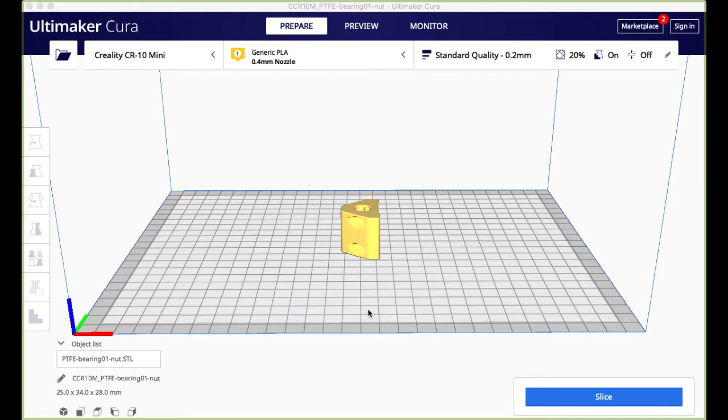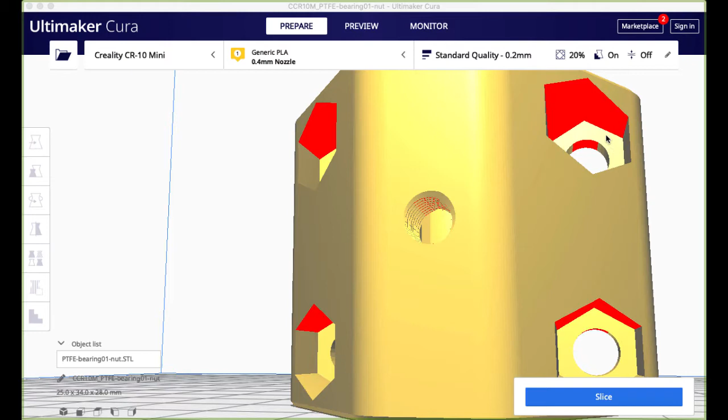So it's a bearing. We have a hole right through the center for the linear bearing to be put through. There's a nut and screw hole here that's actually threaded, you see the threads there to hold the bearing in place. And then we also have these hex nut holes to allow holding the nut in place and the screw to mount the bearing on the other side. I just got this off Thingiverse to use as an example.

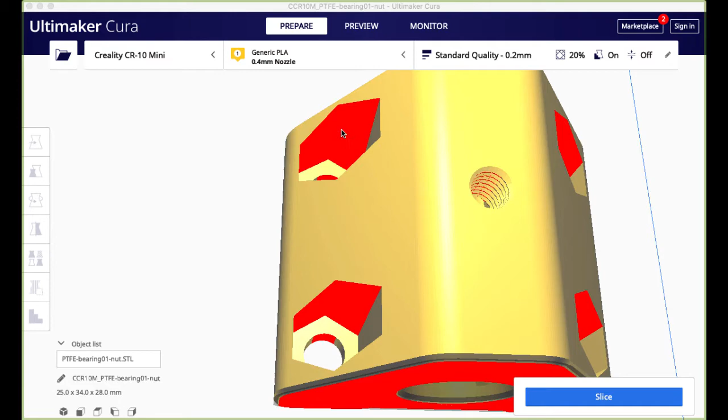Now there's a few things we can do here. Everywhere that you see red requires support, so these require support, all of this is support, and the threaded area requires support. In most cases, I know my printer can actually cover these because it's a small part. I know the overhangs, I'm going to probably print this with PLA or PETG, and I know with regards to size, the overhangs won't be an issue.

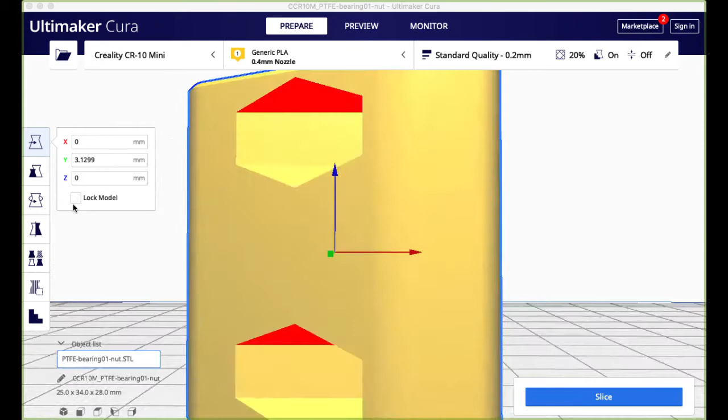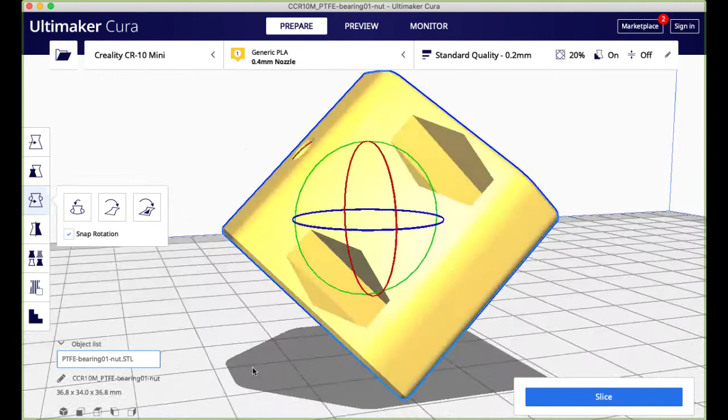Now you could eliminate some of those support options by reorienting your part. You know that this, because of the angle, requires some support. But I can change the angle by clicking here and tilting the part to about 45 degrees. Now these no longer need support anymore because of their angle. But I do need support here and here to hold up this side. And chances are there might be a need to print support all the way through the piece here because 45 degrees is doable, but it's on the edge.

Some printers can do it, some printers can't, and depending on the size of nozzle you're using, it becomes easier with a larger nozzle than with a smaller one. But again, you're dealing with the issue of layer lines you have to deal with. If you want to fine-tune the part, a smaller nozzle is where you want to go with a 0.4 or maybe even smaller.

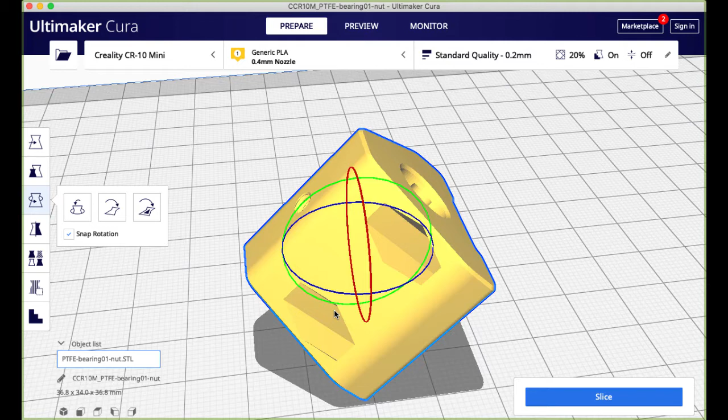Let's orient this back to the way it was, and let's look at some other options. So as I said, if you normally do a preview of this and want to print it, let's do a quick slice. Slicing this will tell me it'll take about an hour and 47 minutes to print.

Now that's not a lot of time, but if I look at the info bubble here and highlight over this, it'll tell me how much time I'm spending on support. So my support right now is 11% of my print time. It's not a lot, but it's something. What if we can shave a few minutes off our print time and decrease the amount of material? Because I'm doing 10 grams of material here, let's see if I can decrease it a little bit. Again, it's a small part, so there won't be much change, but let's look at these support options.

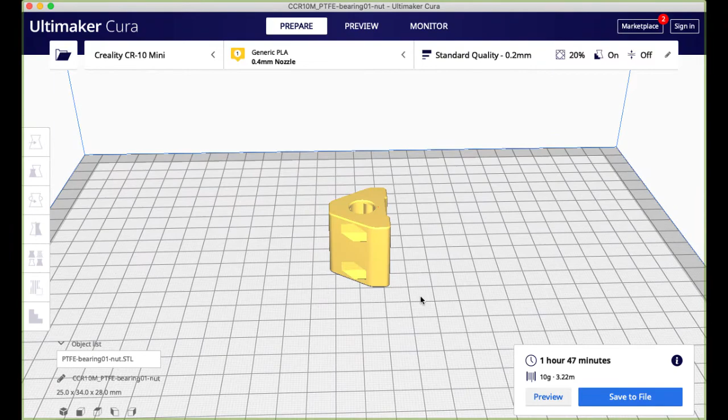Now, as I said, I sliced this, and if I look at it in preview, all of these holes here, because I have support turned on, all require part support to be printed in these holes. It's wasting material, it means cleanup time I don't need to do, and I can eliminate those nice and easily.

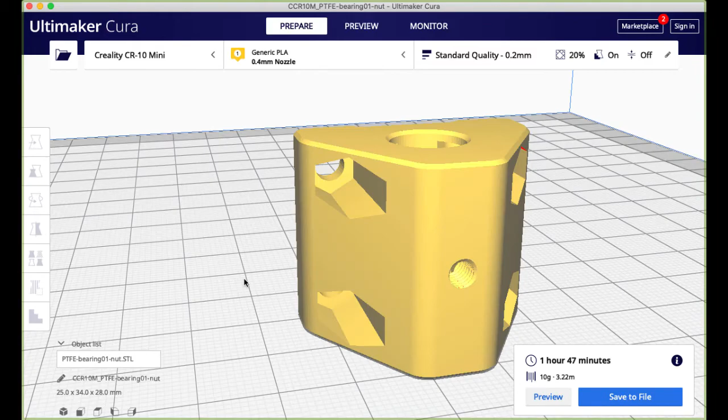So I'll go back to our prepare screen and let's look at putting in support blockers. Support blockers is a nice feature in Cura, and other slicers have this ability as well. So we select our main part. If you haven't noticed, you have an object list here, and if you expand that, you see your main part that you brought in. So if you select that, it selects the part. I'm showing you that for a reason: as we go into adding our support blockers, you can actually leverage this object list to make your selections. It makes it a lot easier to make sure you're selecting the right part.

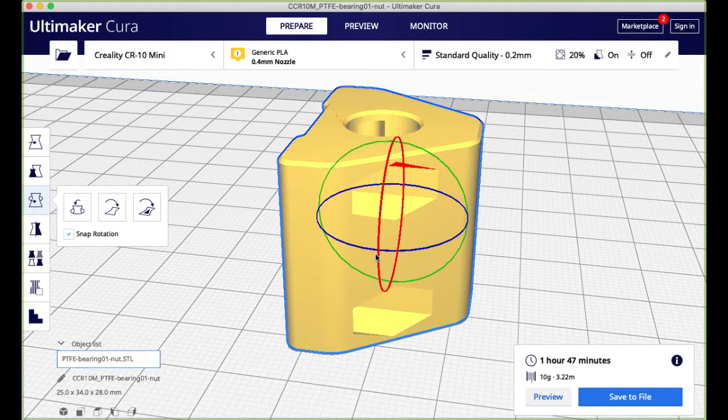So support blockers is here in Cura, this little icon here. I click on the part I want to put support blockers on, click on support blockers, and click, and it creates a box.

Now, this box as it is not big enough, so I want to resize it. Since this is the first one I put in, it's called eraser. I select eraser, and then I want to go to orientation first, making sure I move it up so it's only covering the area I need. I want to resize it to make it longer. Normally you have uniform scaling turned on, but you do not want that here, because if it's enabled and I resize this, the whole thing resizes into one big box, and I don't want that. I only want it to cover the area I need.

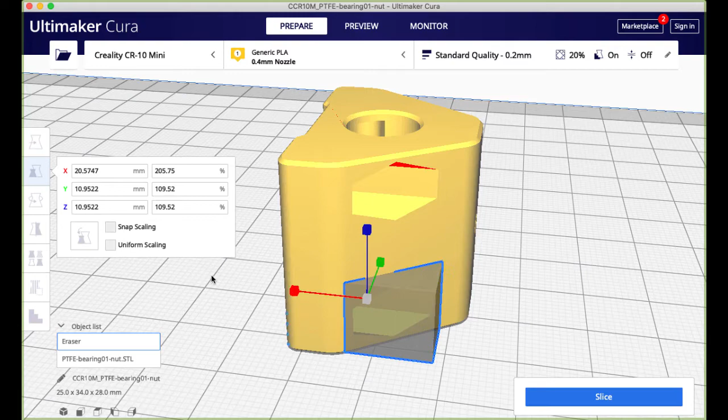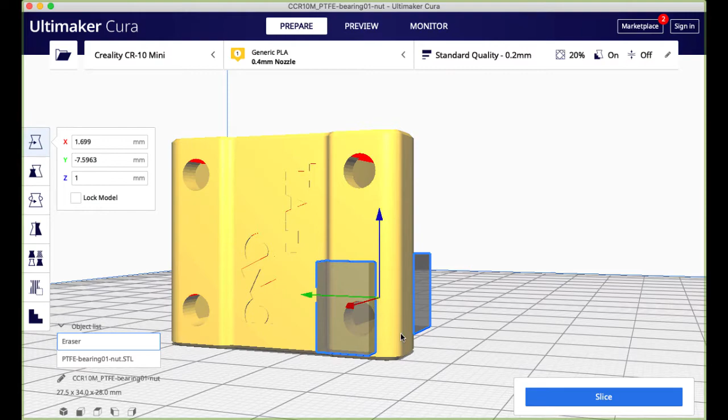So I turn off uniform scaling, and now I'm going to expand it in the X axis. Let's see how that looks. So it's covering the whole area. I can reorientate it and move it up a little bit so it's not on the base, but that's fine. Spin around the other side to make sure it's covering the whole thing. Now if that's too big and I want to make it a bit smaller, I shrink it down a little bit and recenter it over the hole, then check the other side to make sure it's covering everything.

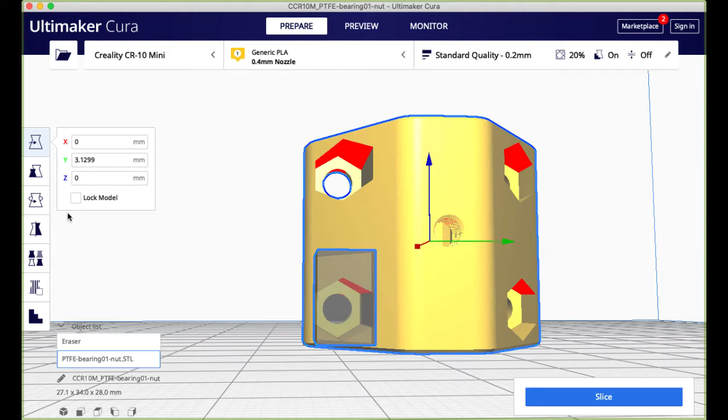So that's one done, let's do another. Again, we select our bearing - we don't want to select the support size, so select the bearing - and we put in another support blocker. We click here for our support blocker, put in our support blocker, and orientate ourselves around a little bit.

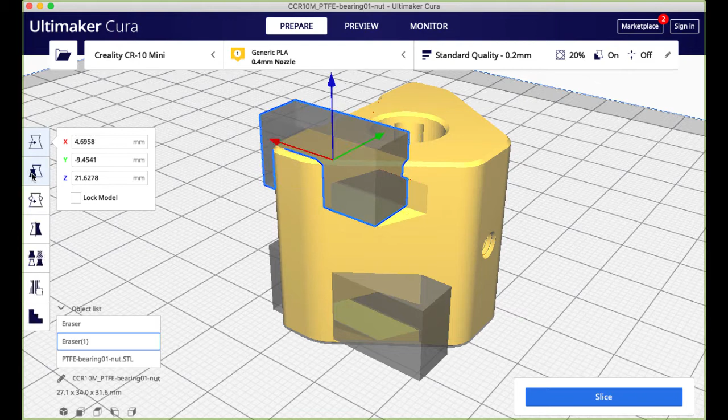Now we want to resize this again. Again, uniform scaling is off. We shrink it down to the size we need, we don't want it overly big. We also want it longer, and we want to move its position so it's in here. I might make this a little bit longer to cover all of the area, and then reposition it again.

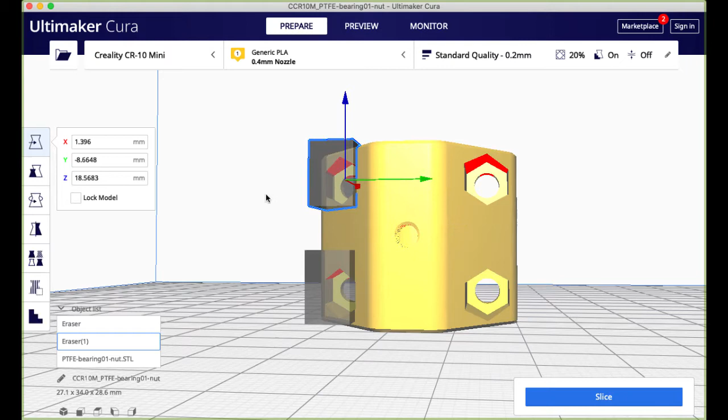And again, to spin around. Now that's too high, so I need to move that down, and that's covering the whole area there. I need a little bit wider on that, so I'll expand it a little bit, so it's covering all of the hole that's here where the nut would normally go, and it's also covering where the bolt would go through.

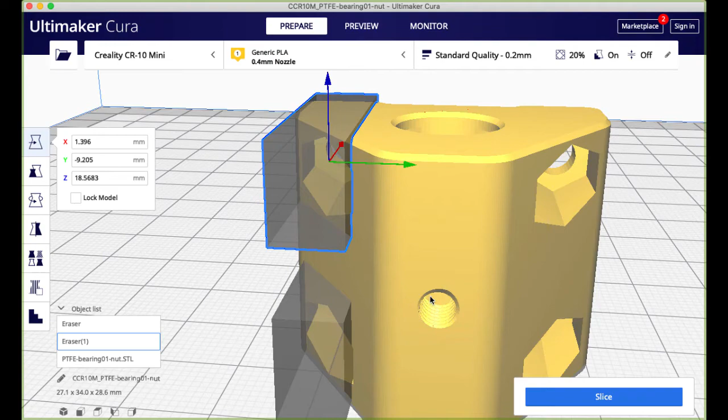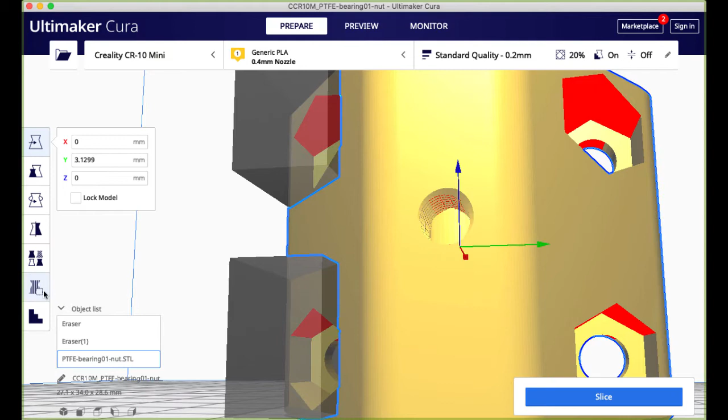So let's do the screw hole next. This is threaded, as you see here, threaded on the inside. So getting support out of this is a pain because you have to deal with the threads, and you will print some support material into each of those threads, and it's very, very hard to get them out. So an easy way to do this, again using support blocker, we can select the part - our support blocker, click right here - and that covers the whole hole, but it's a bit too big.

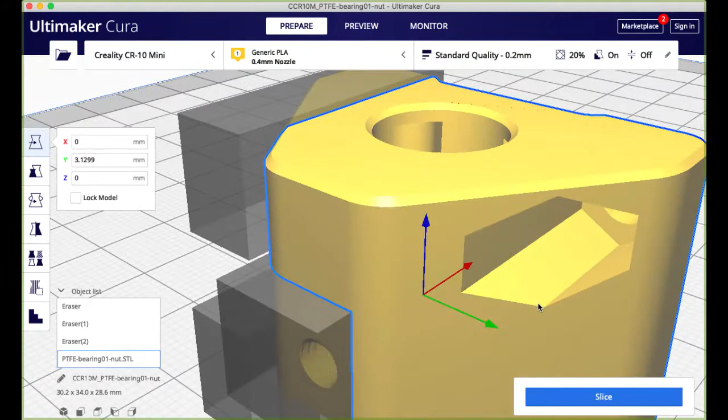So let's use eraser number 2, and you can see it because it's highlighted with the blue box. We're going to change its size and shrink it down. We're going to move it out first of all, because we don't want it blocking the inside, and it's not anymore. And that covers that area.

And then finally we come over to do these two. Again, we select our bearing - we're not selecting that one, we want this bearing nut - and support blocker. We're going to put it in here. Quick orientation, select the object, which is number 3. We're going to resize it to here.

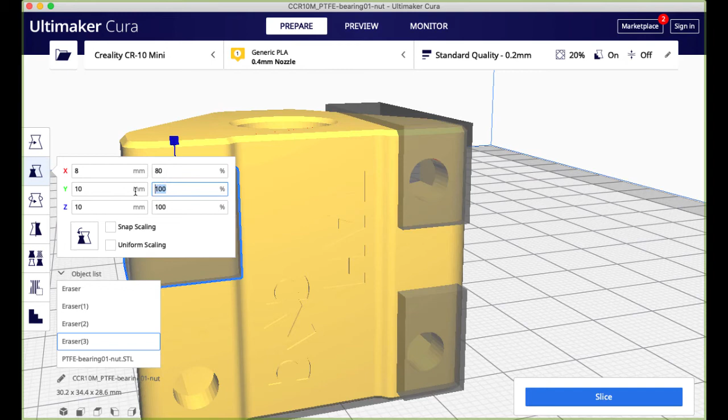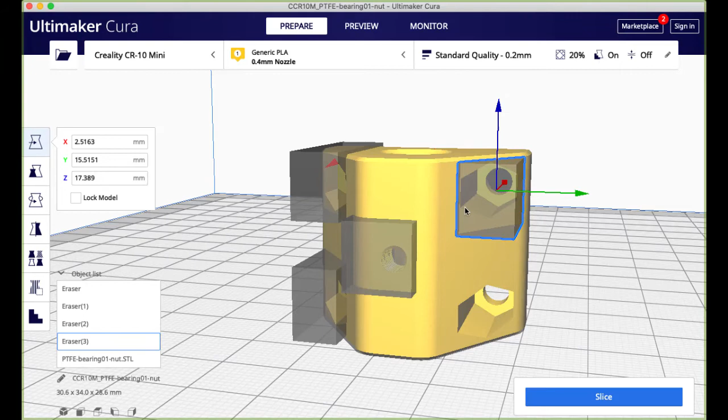We can also resize it here to 80% if you want to - there's different ways of doing it. Let's zoom out, we get our resizing done easier. We want to make it longer, so we just drag this all the way out here, and then we put it into the position where we want it. And we move it up to cover, because the idea is to cover the whole hole that's here, the complete hole that's in there, without impeding into something else.

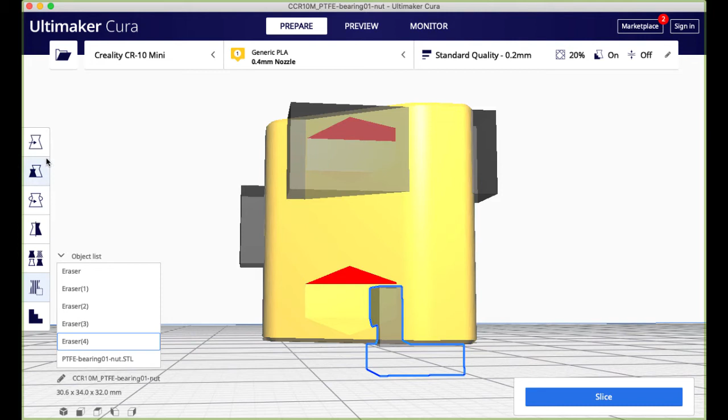So we come over to this side. It's covering all of this. That's perfect. And then we do our last one. Again, we select our bearing, put in our blocker, rotate ourselves around. It's eraser number 4, and we know we've selected the right one. We want to change its orientation, so we want to raise it up.

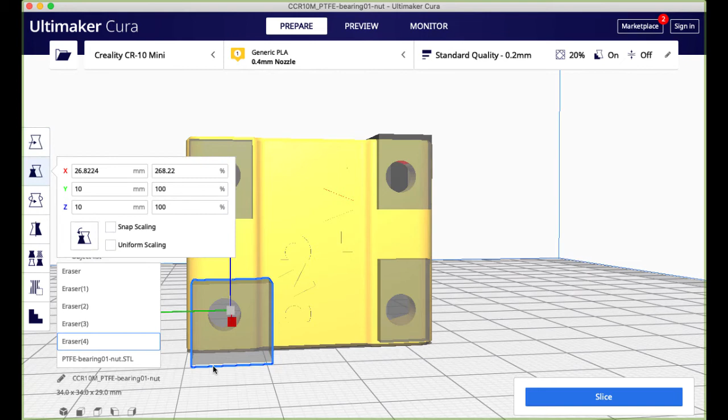We also want to resize it on the x-axis in this case. And it doesn't need to be precise to the edge, it just needs to cover the area that you wanted to stop printing support. Now this is a bit wide, so I'm going to shrink this down a little bit and do a quick move to center it over the hole, because I want to make sure that all the walls of my hole - so this one, see here, this little gap - so I click there and move it a fraction, or maybe I'll have to expand that one a little bit, expand it a little bit, so it completely covers all the walls on both sides.

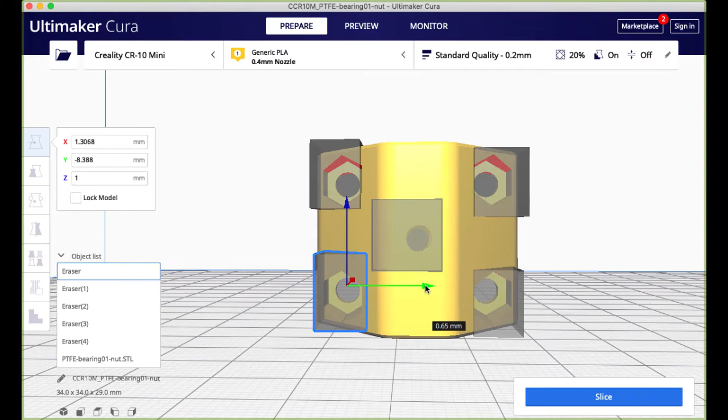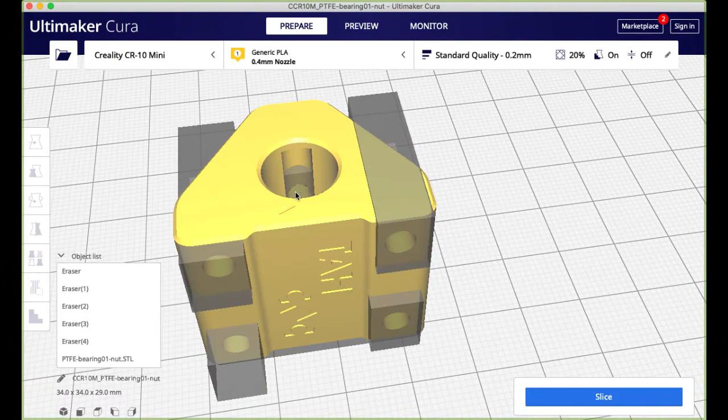So that looks like the holes are completely blocked. Now this will still print. Now there is another area in here where there's little gaps inside the bearing, but I know my printer that this is a small area, so I can actually put a block all the way down through there as well.

So let's put a block on the inside. If I slice this as it is, you will see that I will be printing support in these little gaps on the inside of my part as well. And I don't want to print support in here because it's a pain to get them out and it's wasted material. So I have already decreased my print time down to 1 hour 33 minutes.

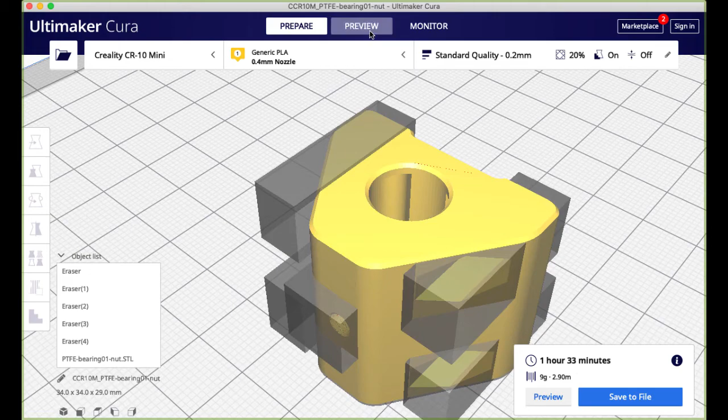And if I click my preview and we zoom in over here, you'll see I'm actually printing supports right here, and I don't want those. So we can actually remove those also by going back to our prepare. Again, select our bearing, get our support blocker, click it right there. Now this is our support blocker for this one part, and I want to make it longer in the Z axis.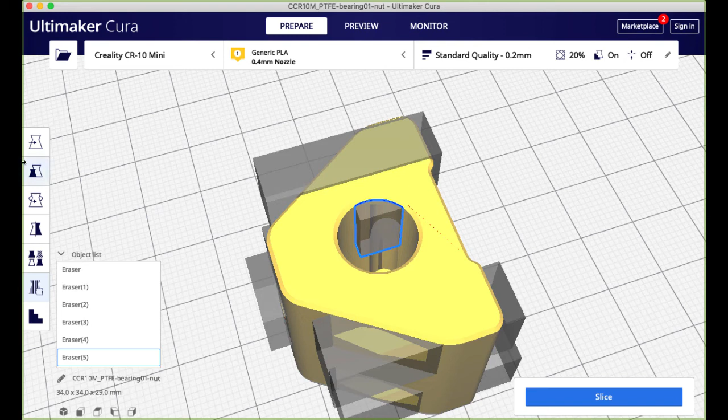So I'm going to select that and make it much taller. And it's okay to have your support blockers overlapping as long as they're not overlapping in an area that you do need support. And I'm going to turn around and reorientate this, so move it down. I can see that easily if I come out here. I can see that I'm actually passing through the part.

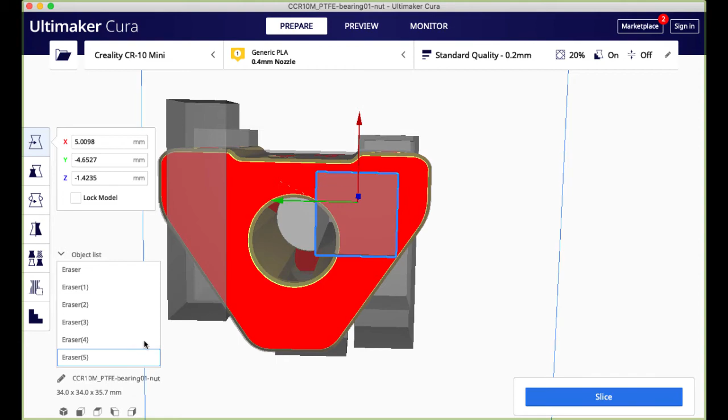And these are overlapping, but that's okay, I don't mind them overlapping. Now, again, I can duplicate that part. So if I move my orientation and come out here, because there's 3 of these areas in my part that need support, that will be getting support. Will be here, this one here, and there's also a channel over here.

So if I select that part and I multiply the model by 1, now I have a copy of it. Now I don't have to resize it and do all of this stuff, I just need to put it in place. So using my orientation tool, I can simply drag this over here to where I need it.

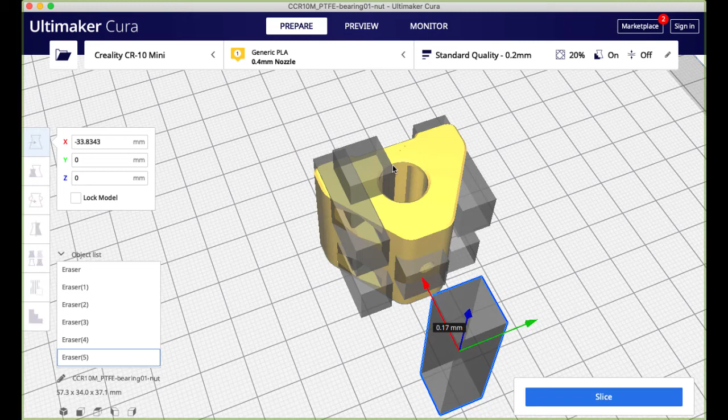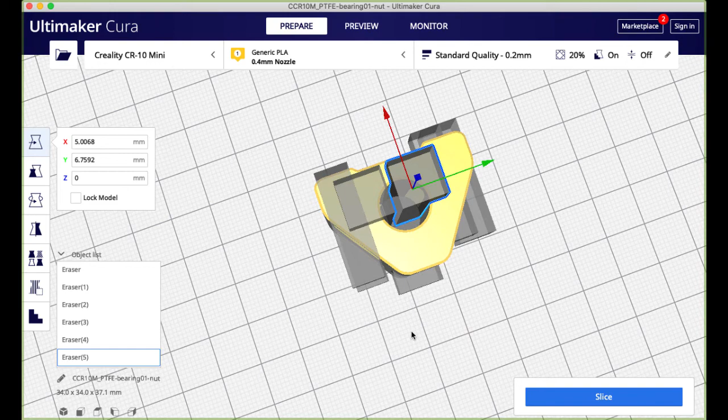And it's a good idea because these are opposite each other, to get them roughly lined up. So now it won't print support there. And again, I can get number 5, I can multiply the model by 1. Move it out and orientate this. So now if I look underneath my part, I have these blocks in place.

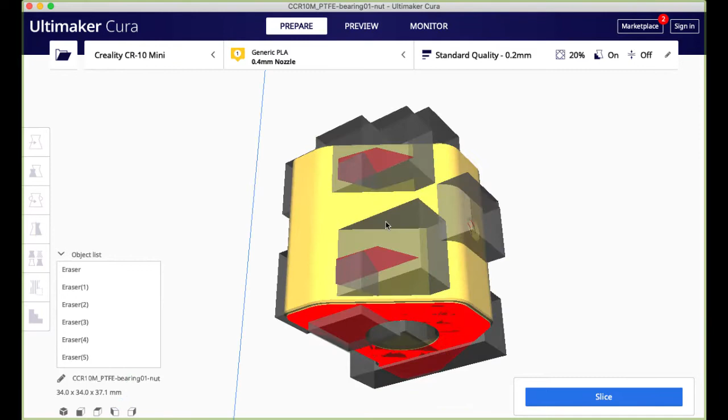I have these blocks in place. These need to come down a little bit, so I need to move that down a little bit because I want them to protrude out to the bottom, because there's nothing in there to support because it's on a flat surface, so it's supported by the base, so I don't need to worry about it.

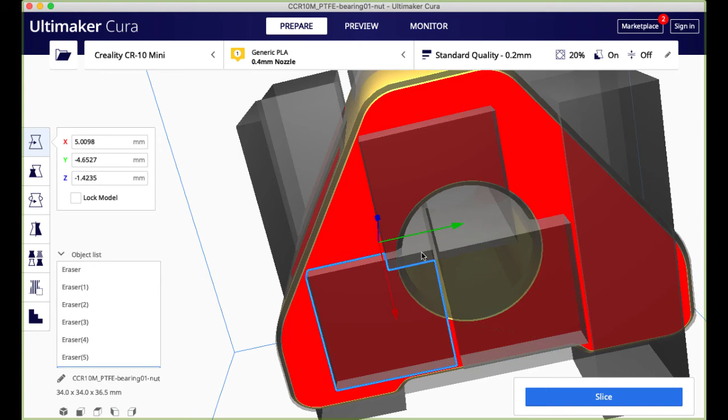I need to zoom in to make sure I'm covering all of my part. It's good to have these overlap a little bit because there's nothing in the middle to be supported anyway. And these are overlapping. That means all 3 areas where I need support on the inside have now been blocked. And once that's done, let me reslice again to see how long it takes.

So I went from 10 grams material down to 8. I went from 1 hour and 45 minutes down to 1 hour and 23. And if I hover over this, you'll see that my support is not listed. Just turn support off, but just to give you an idea of what you can do with support blocker. So I know it's only 2 grams of material, but it's just shaved about 20 minutes off my print time, all by spending 5 or 10 minutes in here getting it ready before I slice.

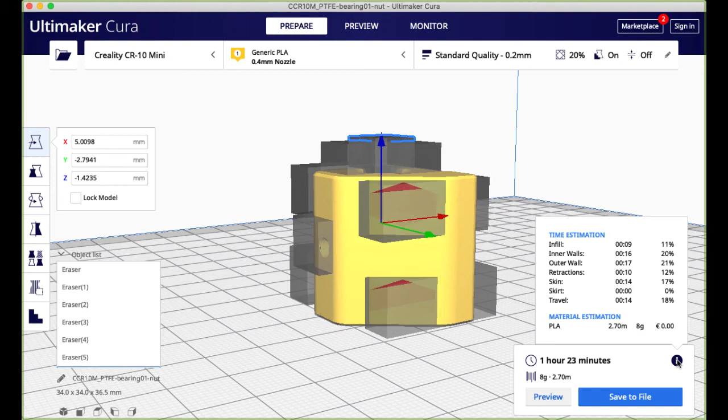So now I've just saved myself not only 20 minutes time, I've saved myself some material, and I saved myself some cleanup, all because I put a bit of planning into my orientation and my support blockers prior to printing, because I know the abilities of my printer and what overhangs it can do and so on.